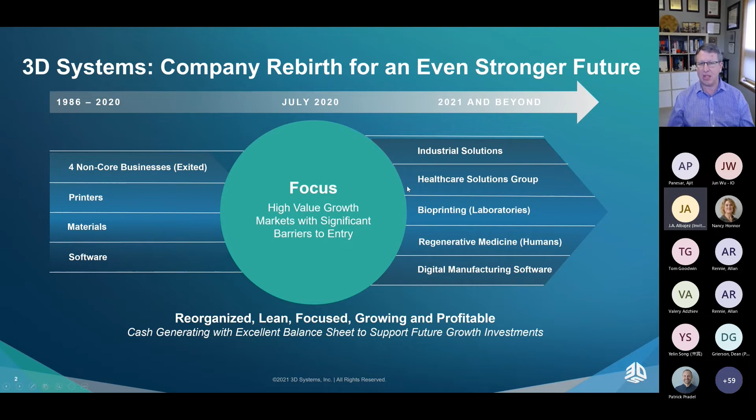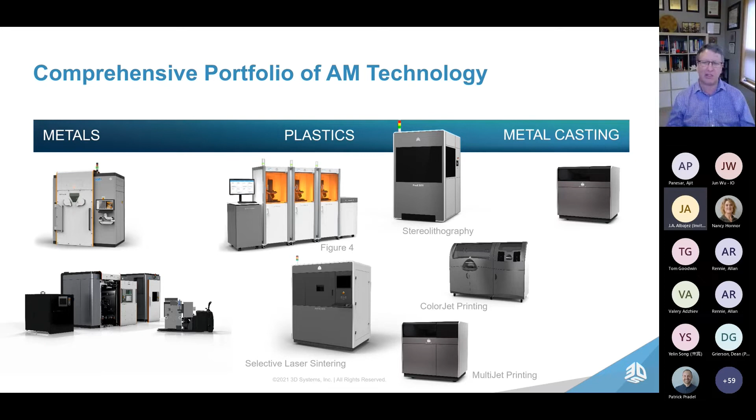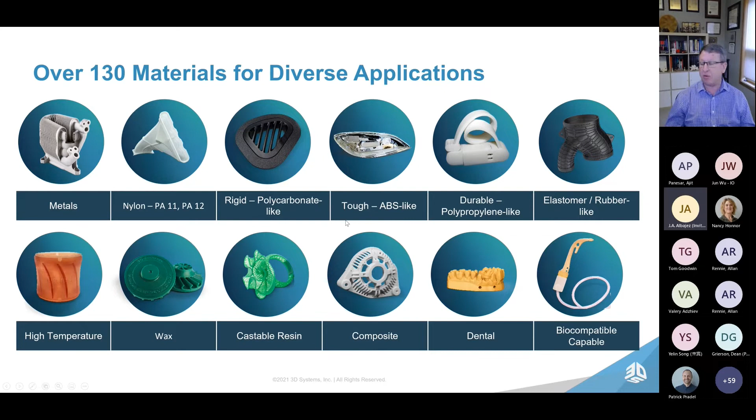When we think about 3D Systems as a whole, we have a very large portfolio of additive manufacturing technologies - metals, plastics, and supporting casting and other processes. In addition, we sell literally more than 130 materials across different platforms for different applications. So when you think about the types of solutions we need from software and design for additive manufacturing, we like to think of this in a much bigger realm than some of the work I've done in the past, or some of the work presented here today.

Beyond that, if we think about what 3D Systems has done traditionally, it's more along the lines of our 3DXpert or 3D Sprint products - whether you're familiar with those or not. They're more the traditional tools: importing data, positioning, adding supports, setting up the build, then sending it to the machine and running it. There might be some simulation tools built in, and in fact 3DXpert does have some. But even though it's integrated, it's still quite manual in its operation.

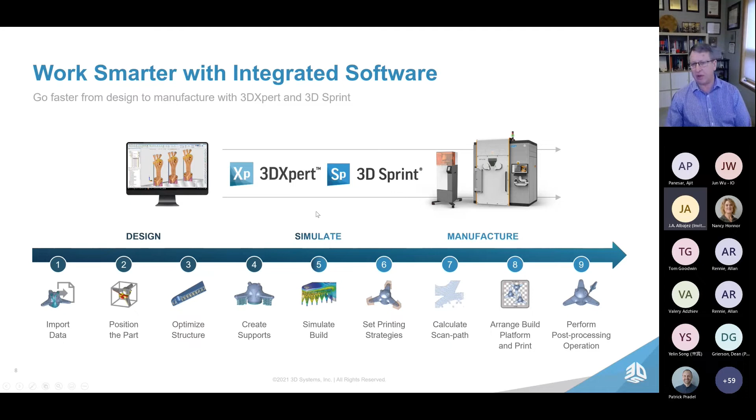One thing you may have noticed, if you follow industry business acquisitions in software, is that 3D Systems just acquired Oqton. A number of people asked why we were buying Oqton. When I joined 3D Systems, this acquisition was already well underway, and I had questions about the goal - why look at something not focused on a specific machine or material, not even focused solely on additive manufacturing? Why something much broader? So I'd like to give you a feel for that today by showing a couple of videos that lay out the goal here, what Oqton can do, and then we'll dig into some details.

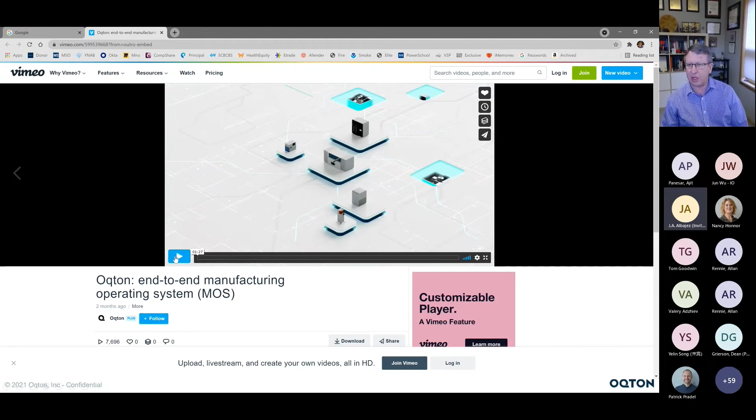So let me first start with this video. I think my audio indicated it's not going to play the audio properly, but we'll see here.

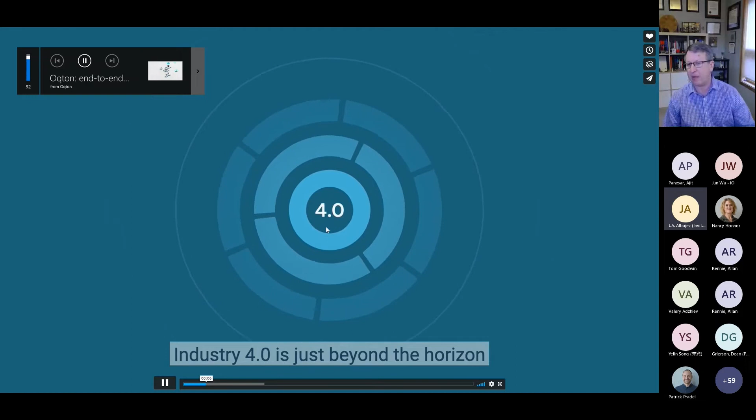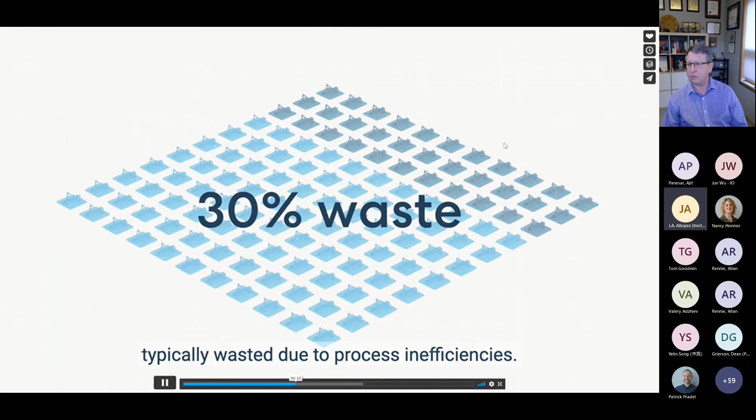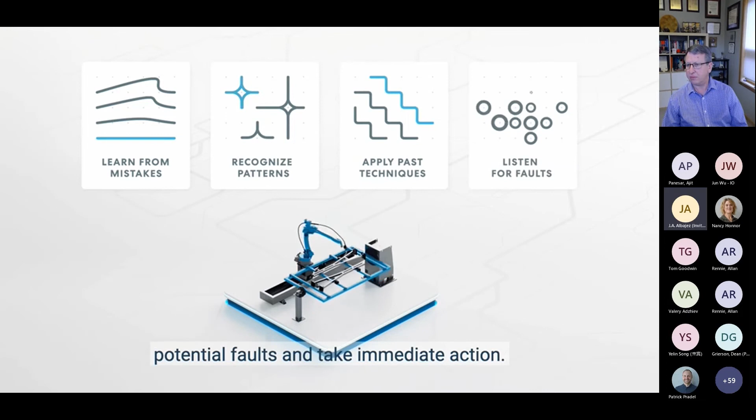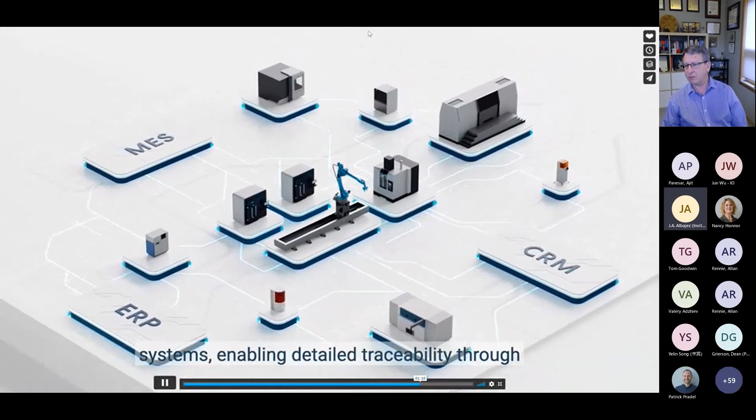Industry 4.0 is just beyond the horizon, promising a new age where humans and machines work seamlessly together, and where digitalization and automation pave a new way of manufacturing. Take the example of welding: 100,000 welding robots are installed every year, and while they are fast, they are not smart. It can take weeks to program them, and when finally up and running, up to 30% is typically wasted due to process inefficiencies. This is exactly where Oqton comes in, harnessing the power of artificial intelligence to teach robots how to learn from their mistakes, recognize patterns, apply past techniques, and even literally listen out for potential faults and take immediate action. Oqton's scalable manufacturing operating system can not only connect 3D printing and CNC machining, but any manufacturing workflow across any type of hardware. It also tightly connects the production environment to existing business systems, enabling detailed traceability through a full digital thread for any size company. That's how Oqton accelerates the pace of change, bringing smart automation closer than ever.

All right, so that was the first video. I think you saw in there this idea: there's a software platform opportunity, and we showed in this case something not additive manufacturing, but welding related - how do we plan welding, how do we design a workflow. Now let's dig a little bit more into the additive side.

I'll play a little video here on the additive side. Let me pull up another video and go from this here.

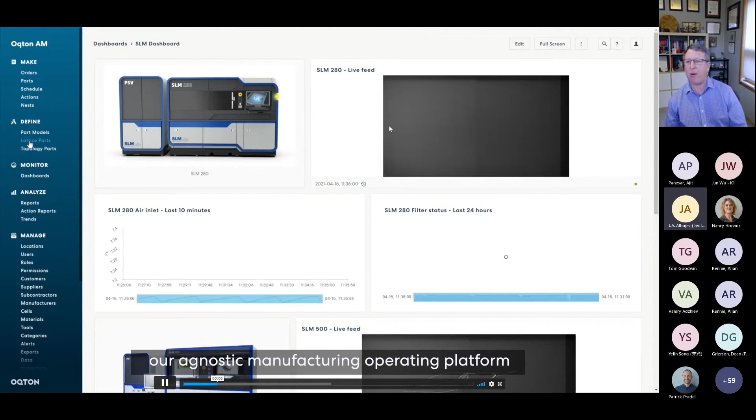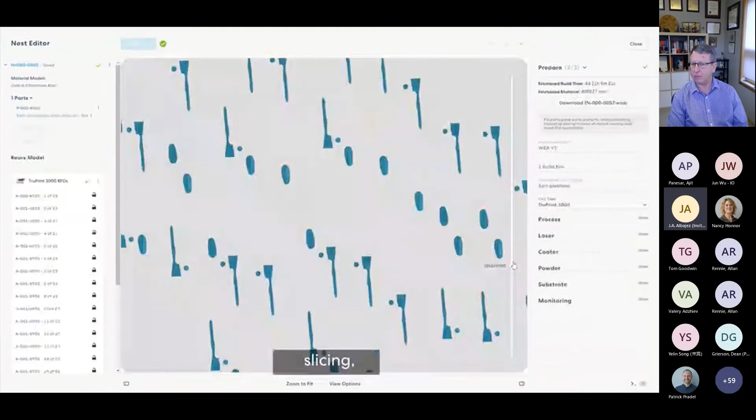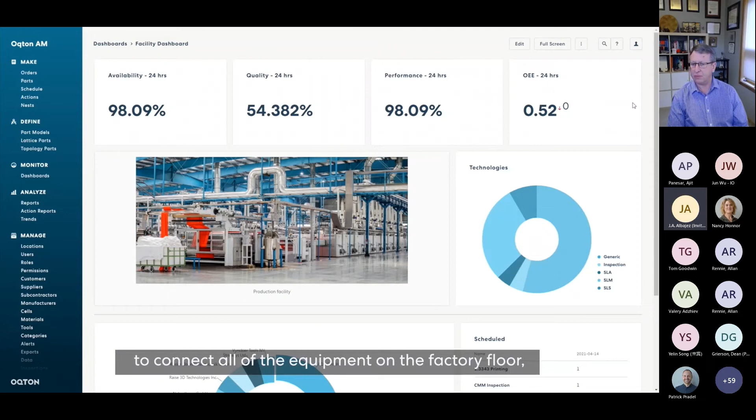At Oqton, our agnostic manufacturing operating platform automates the end-to-end workflow across and beyond the production floor. Oqton combines order tracking, latticing, build preparation, slicing, CAM, and scheduling, and gives you full traceability and data insights. This is an all-in-one cloud-based platform that leverages artificial intelligence to automate every repetitive task, and utilizes intelligent IoT capabilities to connect all the equipment on the factory floor, including plastic 3D printers, metal additive manufacturing machines, and even post-processing equipment. Oqton empowers humans and machines to work seamlessly together. Our team of global manufacturing and AI experts can have you up and running within a day. Experience it for yourself.

All right, so let me get back to the presentation. I think what you saw there is this vision, right? And it's not just a vision, but it's actually a reality. Those applications that were shown there, we actually have things working.

This Oqton platform is really set up as a technology agnostic platform, but it's absolutely critical for additive manufacturing. One of the things unique about what 3D Systems is doing in this space is saying, well, if we want a technology agnostic platform, then in reality it can't just be focused on one company's machines. So Oqton is designed to work on any number of machines, and in fact we already have a whole bunch of agreements with different additive manufacturing technology companies, as well as companies in other manufacturing realms.

So then if we think about what's unique about this - you've probably seen things like manufacturing operating systems, manufacturing execution systems, PLM systems, ERP systems, all these different things that try to tie information together. One of the unique things about what we're doing with Oqton is we're tying this entire digital thread together, everywhere from design all the way through quality assurance, and using artificial intelligence at each step.

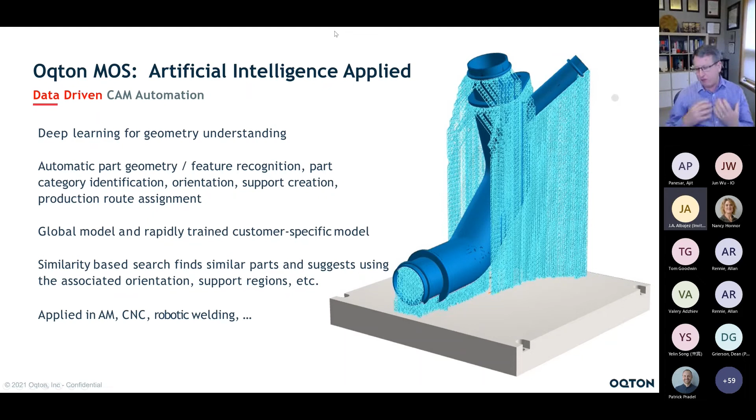So what I want to go through in the last little bit of my talk here is: if we're going to build this big platform, how do we begin to automate all of these things which today are very manual? Let's take, for instance, just setting up the build. There's all kinds of things we do as we set up a build that we could have artificial intelligence learn, either from people or from simulation.

Here's an example of what we're doing in the dental space. Some of you may not recognize that 3D Systems actually has a very large dental and biomedical fabrication facility, with locations in both America and Europe. So we have a very large number of software pieces, before we acquired Oqton, that we use - things for bringing in software, importing it, healing the geometry, choosing the orientation, maybe hollowing a geometry.

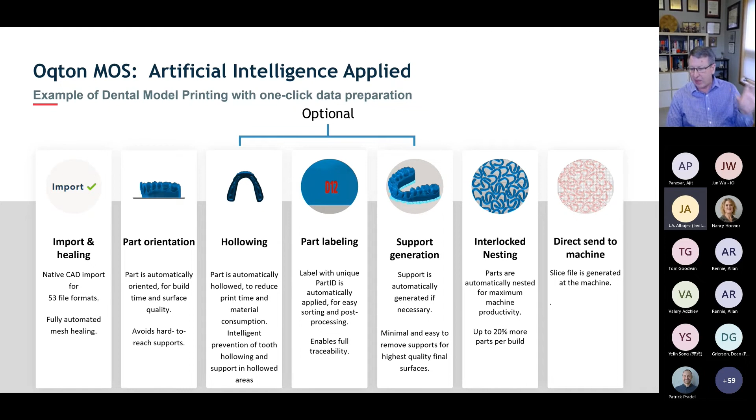Labeling it, generating supports - then how do you lay these out in a machine and how do you send them to a machine? And from there, even how do you monitor the post-processing, so that you can have quality assurance for these biomedical or dental type applications. All of these steps are being added into the Oqton platform as individual components that you can either manually do, or you can have artificial intelligence learn from you and just do it automatically in the future.

One of the things similar to what the other speakers have talked about today is we have a tool in 3D Systems - we recently acquired Additive Works out of Germany, and they have Amphyon. Amphyon is both simulation and also algorithm-based methods for doing things like the inherent strain simulation that Albert talked about before, for looking at thermal buildup in processes.

When do you have overheating in parts? Predicting that. Where do we put supports? How do we do distortion compensation and those sort of things?

So what we can do is, for instance, with this Amphyon product, which can be called a component within the Oqton platform, we can automate the whole idea of orientation selection. For different types of products, you may have a different criteria based upon, say, build volume or support, build time or support volume, or amount of post-processing or support removal or deformation.

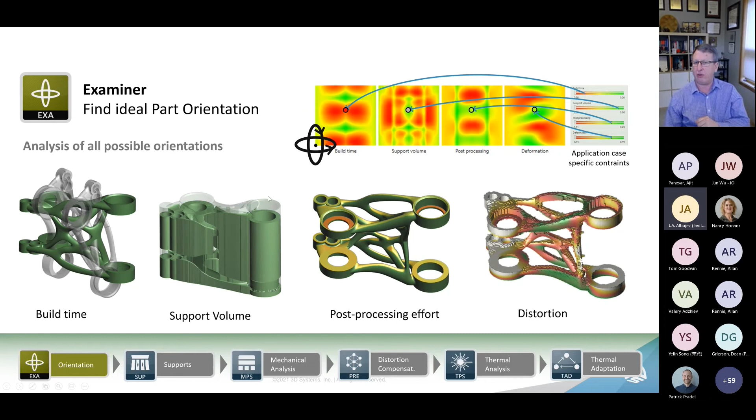It really is application dependent. So normally we set up Oqton for a specific company with specific applications in mind. You can start to trade it - what are the trade-offs for biomedical that are more important than maybe aerospace or automotive? And you can start to train this for things like selecting orientation, for how to place supports.

Again, we have simulation that can design an optimum support, very similar to the type of simulation that Albert was talking about earlier in this meeting. And again, as a component, you can either run those simulations, or one of the things that I found from my research in the past is you can actually train artificial intelligence to predict the outcome of a simulation.

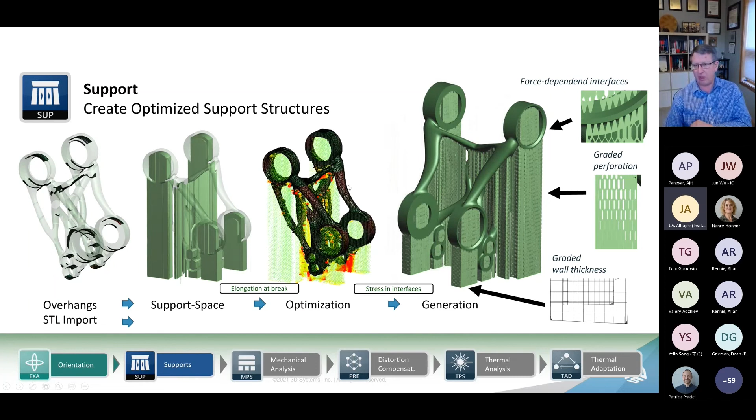Back in some of my prior work with other companies, we found that we could reduce the time by 2 orders of magnitude with almost no loss of fidelity of the prediction. So if you have good training data through simulation or from experiments, artificial intelligence can, about 2 orders of magnitude faster, predict the outcome of what you'll see, and use that to then make decisions early on.

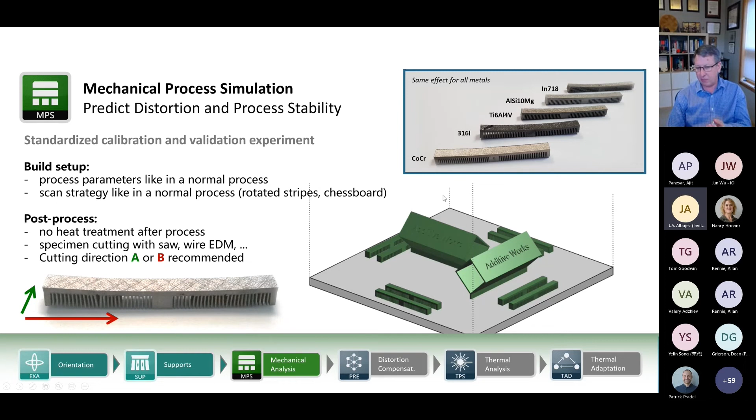This is also true of areas like distortion prediction. And again, as Albert mentioned and others have mentioned, if you can predict the shape change, then you can modify those shape changes and do distortion compensation, as well as do things like predict where recoater interference might occur and where you might need to redesign.

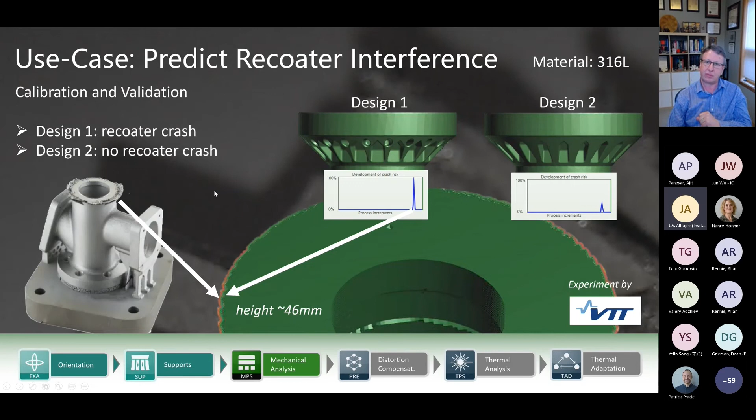So in this case, design 1, as I'm showing here, has these little holes in it and some sharp edges. And those holes, as they connect back to each other, often give unique stress and distortion profiles that can cause blade crashes, where if you change that design, you can minimize the effects or chances of blade crashes in metal parts. I already mentioned distortion compensation.

Gonna move on from there for just a minute. So some of the other things you can do with our platform in general - again, this is a simulation tool. You may have, for those of you who've worked in metals, you know that different layers, when they have different amounts of cross-sectional area, will have a different amount of heat basically put in per layer.

So different regions of your part are going to get different amounts of bulk heating and cooling, and can lead to maybe different microstructures as a result. So sometimes you want to even out that cooling time so that every layer has a similar maximum temperature it gets to after, say, 1 or 2 seconds after the processing.

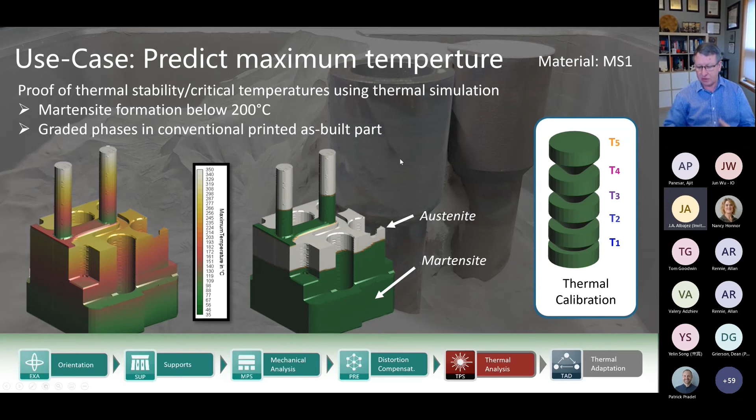But if you do some sort of intelligent machine learning and simulation driven approach, you can achieve the right microstructure throughout, but at 61 hours. Now, again, that's much more than 22 hours, but if the 22-hour one doesn't give you the right microstructure, then it's just trash anyways.

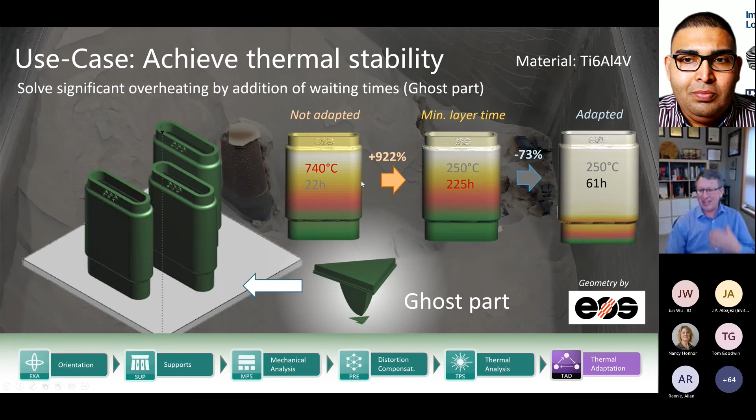So hopefully I've illustrated kind of where we're going with rethinking this whole platform idea of additive manufacturing - that we want to think about beginning and end and all the details in the middle, and how can we throw simulation where we need it, and how can we use machine learning. And I know I haven't gotten a lot of the details of how we're doing because it's only 20 minutes.

But I wanted to sort of give you the vision of where we're going. I think this is my second to last slide, and just say, we can also apply the same thing to the monitoring and inspection. So this is also part of the platform.

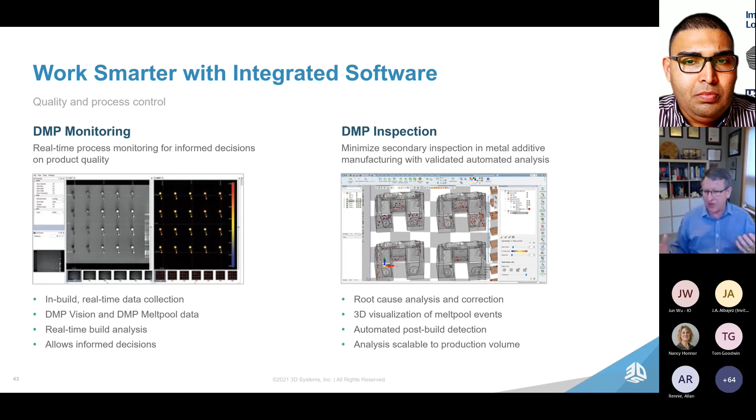You can pull in the process monitoring, the inspection after the fact, and apply machine learning to tie, for instance, what were my end result monitoring and inspection results back to what did my simulation predict for this step, and start to make the entire process smarter, or maybe apply a better inherent strain method, and teach it over time to get smarter and smarter.

So finally, we're trying to rethink this entire flow of things we do in additive manufacturing, for metals, for polymers, for all applications, and say if we can design, prepare, simulate, schedule, monitor, analyze, trace, finish, inspect, certify all of these activities on a unified platform, we'll be collecting massive amounts of data. Part of that is simulation results, part of that is experimental results. And now we can finally apply these big data tools of artificial intelligence that have been so powerful in other areas into additive manufacturing.

So for me, this is really exciting, a way to think about how to use software and how to put it together. And one of the last things I'll say is, this is an open platform. So all of you who've talked about different tools that you've produced today in your research, in your company, all of these things can be plugged in as a component into this type of architecture.

And so I encourage you as researchers to think about how we, even early on in research, could use this. The nice thing about an open platform is you can plug this in today and start using it. It's not like you have to actually create a company. As long as you have a callable component, you can start to play in this kind of an ecosystem.

And as a university, working with industry partners who maybe have this platform, or maybe you're a small company startup, it gives you the ability to start to test what kind of a difference what you're doing today can make in a larger operation. So we're excited about building and putting out this open platform, because we think it's going to really take off and help industry get to the next level.

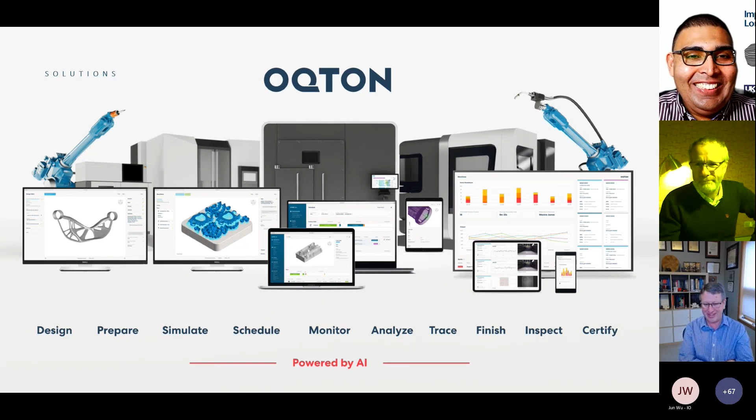So thanks for the question. Thanks, Brent. Thanks, Brent.